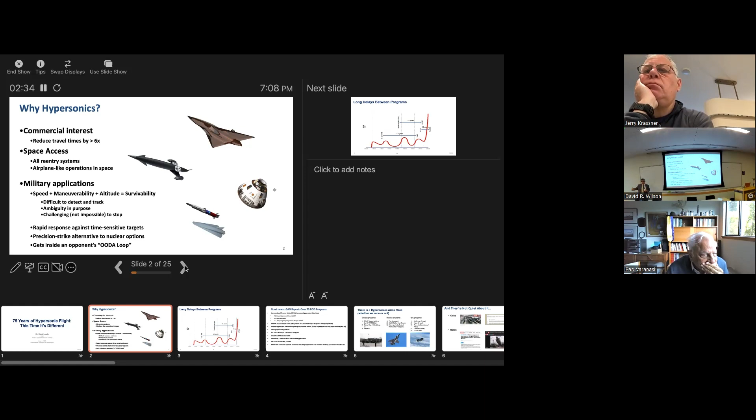Hypersonic flight is flight in excess of about 5 times the speed of sound. You always have to say about, because there's no fixed definition for hypersonic. Unlike the transition from subsonic to sonic to supersonic, the fundamental physics of aerodynamics doesn't change dramatically. Hypersonics is just the high end of supersonic flight, where certain effects start becoming important. Chemistry becomes important. Heat transfer becomes important. Shock waves are pressed very close to a slender body, and all those features are something that we as a community have been pursuing for actually many decades.

So I want to start with the basic question: why would you want to fly at hypersonic speeds? And the answer is sort of obvious. If you've ever flown from Seattle to Sydney, Australia, you'll understand immediately why you would like to fly at hypersonic speeds. Right? There are a lot of advantages to moving at high speed. Certainly, a lot of commercial interest right now. There are companies that are claiming to pursue hypersonic flight for commercial applications. Ultimately, space access. You can use hypersonic systems to give you airplane-like access into space.

But really the focus for the last several decades, and the big current focus today, is on the military applications. I've got an object that can fly at hypersonic speeds in the atmosphere. Not only is it fast, but it can use aerodynamics to be maneuverable. And it can also operate at altitudes that are particularly difficult to detect and to stop. So that means that a hypersonic system is a very survivable system. So for example, if I'm building a missile, if I make it a hypersonic missile instead of a ballistic missile, operating in the atmosphere, it's much more likely to penetrate to its target. Therefore, you can see the obvious military interest.

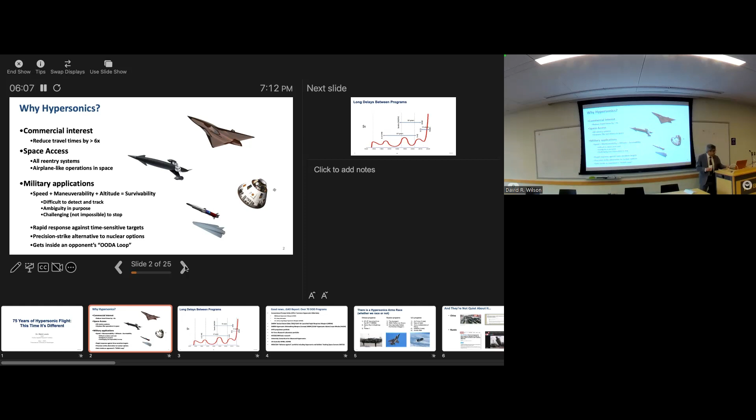It's how the Air Force thinks about the decision process. When you identify a target, decide what it is, figure out what you're gonna do against it, and then take that action. And so you'll often hear the saying, get inside the opponent's OODA loop. That just means you are moving so quickly, you are so hard to figure out what you are, they're so hard to figure out where you're going, that someone can't even decide what they're gonna do to counter you. So all those features, as you can imagine, makes hypersonics a particularly attractive area to invest in.

All right. So for the title of my talk, you saw the title, This Time It's Different. And the reason I say that, for those of us who've been in the field for many, many years, we have observed that there is a funding and programmatic interest periodicity in the field of hypersonics. So I'll take you through some of that history.

The first human-made hypersonic object was a sounding rocket launched on top of a V-2 rocket that had been captured from Germany. Launched in 1948, it was something called Project Bumper. The sounding rocket hit a little bit above Mach 5, almost Mach 6. And so that makes it the first official human-made object. Interestingly, that was done at White Sands, and after they did a couple of those flights, most of which failed, they decided they needed to find a new location. So the Air Force decided to locate at a new launch site in Cape Canaveral, Florida, which was the origin of what is now Cape Kennedy.

After those launches, some experimentation, then the 1960s hit. And throughout the 1960s, we were flying a vehicle called the X-15, the X-15 rocket plane. If you've been to the Air and Space Museum in Washington, D.C., if you've been to the Air Force Museum in Dayton, Ohio, you can see an X-15, an incredible program. They built 3 vehicles. They flew them throughout the hypersonic flight corridor, 199 separate flights, piloted by some very famous pilots, including Scott Crossfield, but also Neil Armstrong. And a couple years ago, there was a movie made about Neil Armstrong's life, and it actually opens with the scene of him flying the X-15 rocket plane.

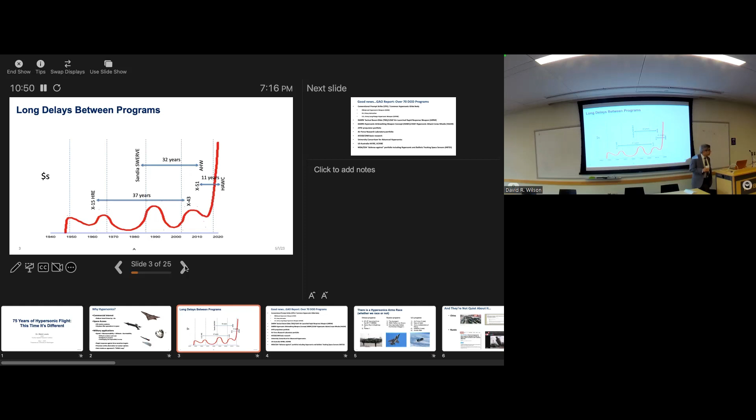So, a year ago, November, the General Accounting Office did a survey of all the current hypersonics programs that were currently funded in the US government. And they came up with a list of over 70 programs across the field. For faculty members, take notes. That means there's lots of funding available in the area of hypersonics, lots of dollars flowing at everything from the very fundamental level all the way to the advanced level.

The key programs were actually real production programs. So the US Navy has something called the Conventional Prompt Strike Program. They're working with the US Army on that program. The US Air Force has a program. They had a program called ARRW, and now have a program called HACM to deliver a hypersonic cruise missile. DARPA, the Defense Advanced Research Projects Agency, has a number of programs in the field, including something called the Tactical Boost Glide, we'll talk about in a little bit, and the HAWC program, the Hypersonic Air Breathing Weapon Concept program.

Then there are the fundamental efforts. AFOSR, the Air Force Office of Scientific Research, part of the Air Force that invests in basic research, has a pretty robust hypersonics portfolio. The Office of Naval Research, also the arm of the Navy that does basic research, they're investing in the field as well.

Big development. In 2019, the department set up something called the University Consortium for Applied Hypersonics. I believe the University of Washington is a member. Right now, I think there are over 100 universities and over 100 industry partners funded in this consortium. And here the goal is to have university faculty members working with direct relevance to the major efforts that are underway.

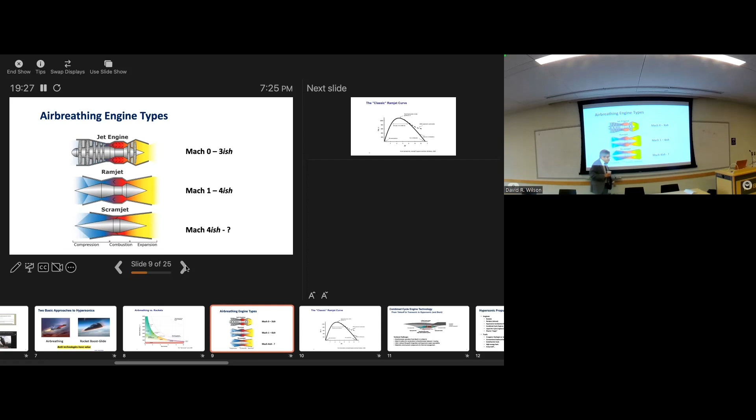As you increase your Mach number, you get a pressure rise. You can get useful work out of the engine. Ramjets typically operate above Mach 1. They don't work well below Mach 1. But then you get to this point where, as you get a higher and higher Mach number, a ramjet stops working. And the simplest explanation for that is that when the air is coming into the ramjet, it's slowing down.

It's decelerating. At some point, it decelerates to the point where the static temperature is equal to the combustion temperature, which means the air is now as hot as it's going to get if you burn fuel. So you don't release any energy by the additional combustion of fuel. You don't release energy, you can't produce useful work. There's no thrust.

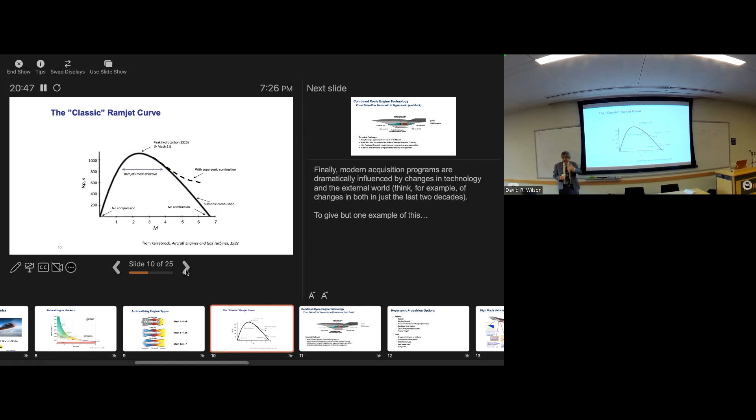So the solution to that is you never slow the air down completely inside the engine. You keep it moving at high speed. And if that happens, you can continue to produce thrust at higher and higher Mach numbers. So that's the theory behind the scramjet. And it's something that honestly I've spent most of my career working on in various incarnations.

Now, remember, scramjets don't work at low speed. So what do you do at low speed? Well, if you want to build an airplane, for example, that takes off from a runway at Mach 0, flies through transonic to supersonic, then hypersonic, you need to combine engines in some way. You need to combine cycles. You have an engine which is a scramjet as part of its flight and another kind of engine at other parts of its flight, or you do multiple engines, a low-speed propulsion system or a high-speed engine.

Various takes on this, various concepts have been proposed. But in most cases, we usually would combine a turbine of some sort from low Mach numbers with a ramjet and a scramjet for higher speed operation. All right, so with that in mind, if I gave you a list of all the propulsion concepts for hypersonic flight, it actually would be a long list. I mentioned rockets. That's a simple one. We know how to build rockets. Ramjets almost get there, but not quite. Scramjets, combined cycles I just mentioned.

There are other engine concepts, liquid air cycle engines, where I use really, really cold fuel to condense air, make it liquid air, and then burn it like a conventional rocket engine. And then every couple of years, someone comes up with some new plasma magic where they're going to ionize the air and accelerate electromagnetically and magically extract energy and put energy back into the flow. And they never work, but they keep kind of coming back as ideas.

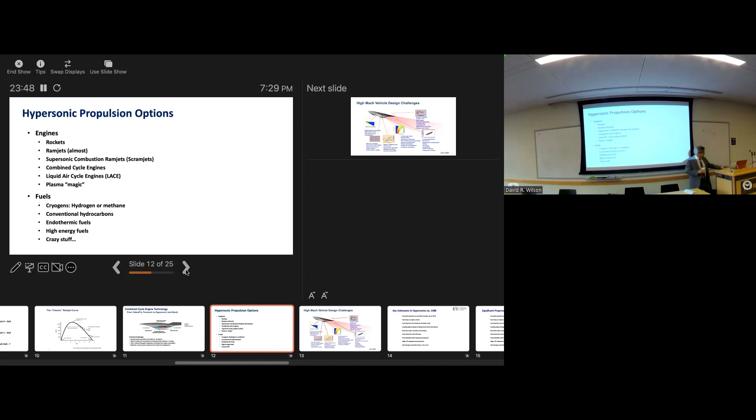So I'll show you we've made progress on almost every single one of these categories, but there's still a lot of progress left to be done. Right? There are still ways that we can optimize these systems. But if you look at those challenges, they fall in several categories. One is getting the engine to work and integrating the engine with the vehicle.

Hypersonic vehicles tend to be very slender. It means the front of the vehicle is the inlet, the back of the vehicle is the nozzle. So I've got to design an engine that integrates well with that inlet, the inlet forebody, with the nozzle aft body. And if I don't get the flow field right on those parts of the airframe, it could have really bad effects on the performance of the engine.

Understanding chemistry inside the engine. On a typical scramjet engine, the residence time, the amount of time that air spends inside the combustor, is about 1/1000th of a second, a millisecond. So you've got a millisecond, the time the air enters the front of the engine to the time it goes to the back of the engine, in which to inject your fuel, mix it, and burn it efficiently.

That's quite a challenge. Lots of aerodynamic effects on the outside of the vehicle. At hypersonic speeds, you get really hot. So handling surface temperature is really important. Sharp leading edges, especially, get very hot. You need a sharp leading edge if you're gonna fly through the atmosphere for a long period of time, so you've got to handle that.

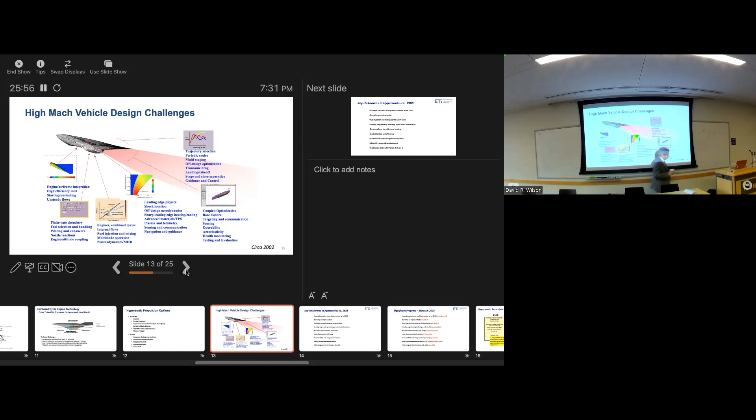Understanding the basic physics, what happens in a boundary layer at hypersonic speeds, still a big unknown. What happens when a shock intersects with another shock wave at hypersonic speeds, still a big unknown. And so really, really long list of fundamental problems that will keep us all in business for some time to come. So let me zero in on a couple of those, especially related to propulsion.

And this is kind of slightly self-oriented, how life has changed in the time that I went from a graduate student to where I am today. Right, so I graduated with my PhD in 1988, and at the time, we had a list of all these problems that we thought were almost insurmountable. We didn't know if you could actually build a scramjet engine that would operate at any Mach, let alone Mach 25, which the folks running the National Aerospace Plane wanted to do.

We didn't know what would happen if a scramjet engine flying at high speed, designed with a relatively weak shock wave, suddenly disgorged a normal shock wave. It's called an engine unstart. And when that happens, you get a sudden pressure rise. Thinking at the time was the engine would actually not survive that phenomenon, that the engine would blow apart.

We didn't know if you could even inject fuel and mix it at high Mach numbers. We didn't know about boundary layer transition and heating. We're pretty good at characterizing when boundary layers transition from laminar to turbulent at lower speeds, not so much at high speed.

Didn't know the effects of inlet distortion. We didn't know if you could even control a hypersonic vehicle. There are all these fundamental questions. You know, if the engine is so coupled with the performance of the airframe, what happens when you maneuver? What does it do to the engine? All right, if I pitch up, do I suddenly lose thrust?

Things like that. We didn't even know how to design fully integrated systems where I had really high lift over drag ratio, which I need for long duration cruise, but also integrated propulsion plants. We didn't even know what the inlets for those vehicles should look like. Should they be square? Should they be round? Should there be something in between?

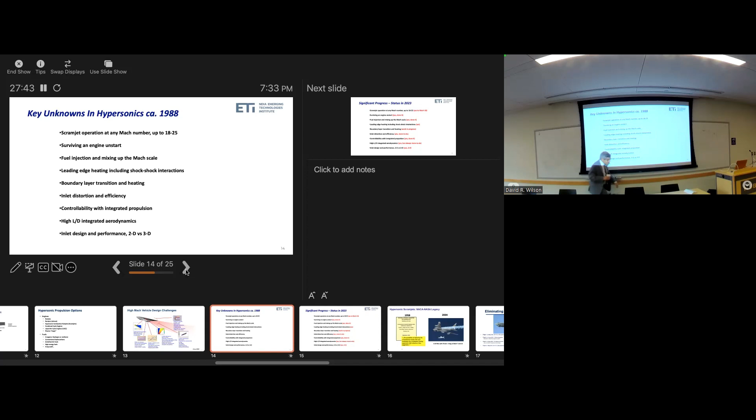I'll fast forward to where I think we are today. So first question, scramjet. Yes, we run them. Well, not to Mach 25, probably never to Mach 25, but we run them at Mach 5, we run them at Mach 7, we run them at Mach 10. Those scramjets work. Turns out engine unstarts, at least under those conditions, they've happened. The vehicle survived. And indeed, under some circumstances, the engines actually restart and go on powering the vehicle very nicely. Fuel injection, yes, well, if the scramjet worked, then you were able to inject fuel, mix it, and burn it.

Leading edge, a lot of work has been done on leading edge heating, lots of fundamental work, applied work. Boundary layer transition remains an unknown category, and so a lot of work underway in that area. But what we've essentially learned is we have to design against our unknowns. So if we don't know where the boundary layer is going to transition, then we have to take that into account in the design. Although there have been some programs that got stuck trying to do that, and on and on. So the list is actually pretty good. We've made a lot of progress.

Let me talk about some of the key programs that made that progress. So earlier on, I talked about the X-51 program. But first, I'm going to start with the X-43 program. So X-43 was a NASA program. It was a small scale vehicle, about 12 feet long, mounted on a rocket. This is a Pegasus rocket from what was then Orbital Sciences Corporation, now part of Northrop, dropped off the wing of a B-52 bomber. And in 2004, they did 2 flight tests on X-43.

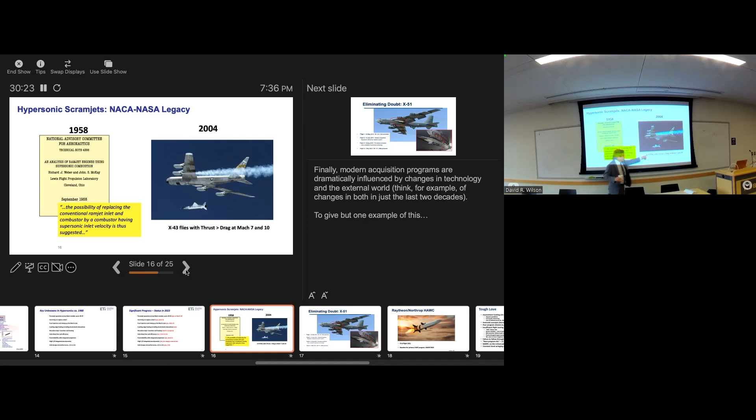You had 2 researchers working at what was then the Lewis Flight Propulsion Laboratory in Cleveland, Ohio, now the NASA Glenn Research Center, Weber and McKay, and they did this fun little paper, which is this thought experiment. They started with a ramjet engine, and they did the thought experiment of what would happen if, instead of slowing the air down inside the engine, I kept the air moving at supersonic speeds. It's a beautiful, beautiful piece of work, because they essentially established all the fundamental underpinnings for all the work that came subsequently. But 46 years later, we actually got their theoretical concept to work in practice.

Now, after this incredible success, what did the United States Air Force do? This is an Air Force Research Lab program. What did they do? Did they build on that success? Did they continue investing? Did they build more X-51s? No, they stopped the program. They actually flat out canceled it. And they all high-fived and went home and said, all right, we've done that.

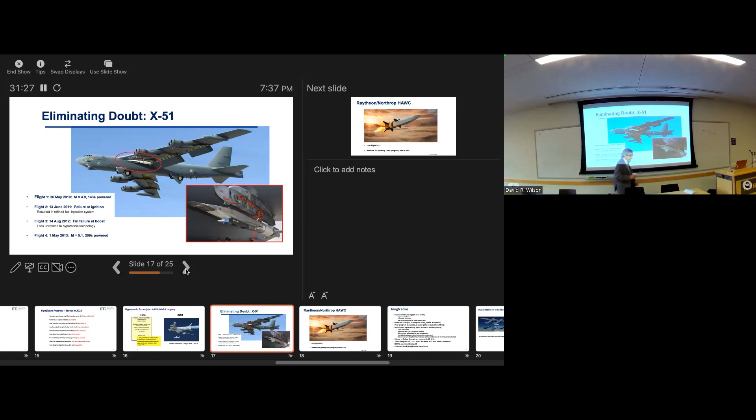And the result is that the very next time that we flew a supersonic combustion ramjet was in 2021. This is the DARPA HAWC program, which is the technological successor to the X-51. You'll notice it looks somewhat similar. It's got a rocket booster that gets it up to speed, and the rocket separates. Instead of a squared inlet on X-51, it's now got a round inlet, because we think that's the better way to design inlets. First flight was in 2021.

Second thing about this is that HAWC has now become the baseline design for something called HACM, the Hypersonic Attack Cruise Missile. And that's going to be a real US Air Force program. So it took us a while. It took us some breaths, a lot of handwringing, but we're kind of getting there.

All right, so now let me get to the tough love part of the field. And this is where I get to yell at my colleagues in hypersonics for what we've all collectively been doing wrong. I started out talking about the inconsistent funding cycle in hypersonics. That's bad for several reasons, not the least of which is it impacts the workforce. In the days of the National Aerospace Plane, there was tremendous ramp up of workforce in hypersonics. Companies were hiring, universities were investing.

I was in that wave. Then that all went away. And I had a lot of colleagues who got out of the field. A lot of that investment was lost. Right now, in fact, in the last few years, most of the companies working in hypersonics have been trying to hire fast and furiously, and they're finding it difficult. One of the reasons we're so excited about the UCAH program that I mentioned, the university program, is helping to reinvest in the workforce.

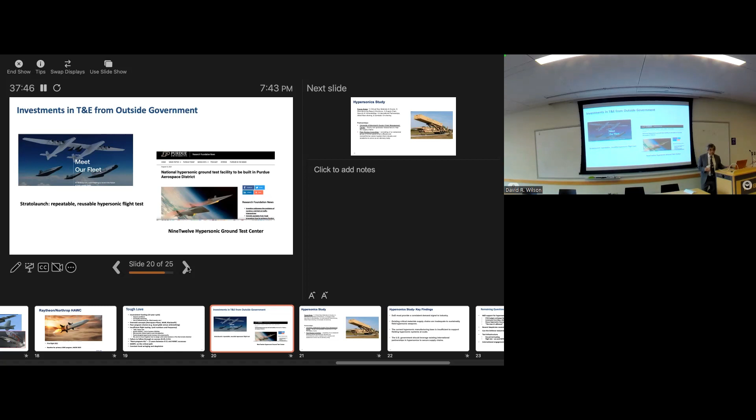Purdue University, which is going to be my employer as of a week from today, has exotic plans to build something called a hypersonic ground test complex. It'll be a big wind tunnel complex, and they're looking for private investment from industry to help them make that happen. A little bit of investment from government, but mostly from industry. The idea is build it and they will come, which is to say the government will step up to the plate.

All right, let me shift to another aspect of hypersonics, and that is supply chain. And this is something that I've been involved in very, very recently at the National Defense Industrial Association. We decided to do a look at what supply chain you need if you're going to build hypersonic vehicles in large numbers. And we looked at critical raw materials and goods. We looked at how you manufacture these things. We looked at vulnerabilities. Can someone mess up your supply chain? And then we looked at the importance of international partnerships.

We teamed up with my old employer, University of Maryland. They've got a supply chain management center, and they did a deep dive across the board. There are some unique materials that get used in a hypersonic vehicle, high temperature materials, for example, that come from around the world. So that was one of the key areas that we focused on. Manufacturing. So today, most of the concepts for hypersonic vehicles involve the use of additive manufacturing. We're not really good at large-scale bulk additive manufacturing, so that was something else that we identified. And we came up with a couple of recommendations.

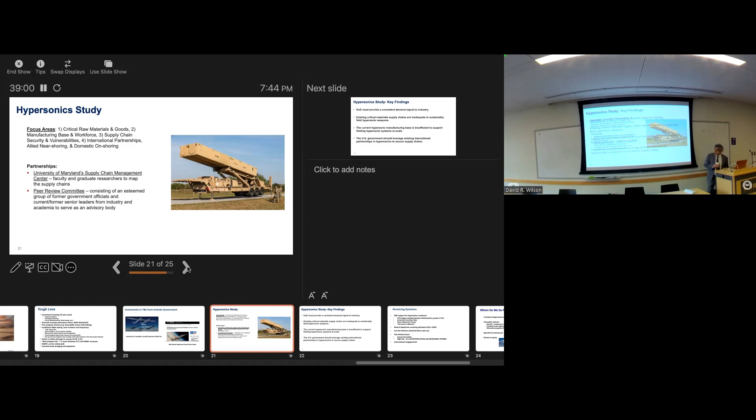First, we kind of told the DoD what should be a blinding flash of the obvious, that you need to have consistent demand signals in industry. Lots of people in industry tell us, every 15 years, the bottom drops out of this field. So if you want us to invest and build our own wind tunnels and build up our workforce, you need to be consistent. We found vulnerabilities in critical materials. We found that the supply chains today are inadequate to sustainably field the numbers of weapons that the DoD would need. We found that the manufacturing base is insufficient to support fielding large numbers of these things.

And we put a really strong emphasis on the importance of working with friends, partners, and allies. I mentioned earlier the Australia partnership. It's a big part of what the department is doing. But that becomes absolutely important, not just for intellectual capital, not just for capabilities, but also to secure our supply chains.

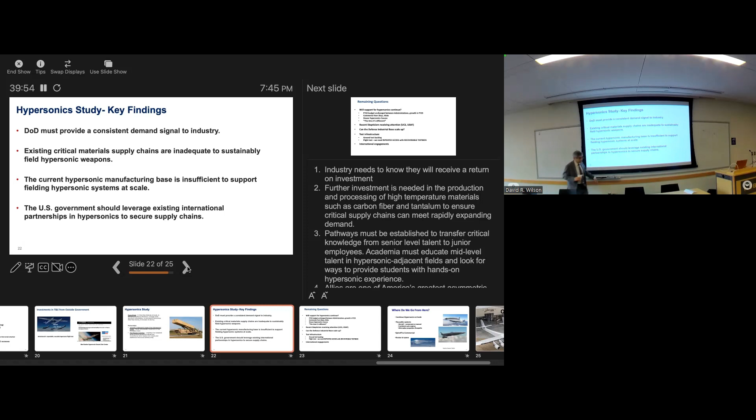All right, so let me close up by posing some remaining questions. First, the obvious one: is it really different this time? Will support for hypersonics continue? Well, if you look at the way the government's been budgeting so far, the answer seems to be yes. The FY22 budget showed a significant ramp up in funding in the field, and then the FY23 budget came out and was even better.

So that's kind of good news. You hear good comments coming from Pentagon leadership. Heidi Shyu, who is the Undersecretary of Defense for Research and Engineering in my old office, has been very supportive, as has the Deputy Secretary of Defense, Hicks. The House of Representatives set up something called the Hypersonics Caucus, which is to promote hypersonics. So I think it's pretty safe to say, yeah, this time it's different.

There's been some recent skepticism. About a year and a half ago, the Union of Concerned Scientists wrote a paper attempting to debunk the value of hypersonics. I have suggested it as recommended reading for all graduate students in the field because it is so technically flawed in so many ways. I'll give you an example. They decided to model a hypersonic vehicle.

So they found an aerodynamic model from a Chinese publication of a US configuration that we flew and it didn't work. And by the way, the model was wrong. So it was the wrong model and the wrong configuration. And then the folks who wrote that paper flew the vehicle at -4 degrees angle of attack, which is hilarious. And so all the results were wrong. But it got published by the Union of Concerned Scientists, and got a lot of attention, unfortunately.

That's a really interesting concept, but you're flying hypersonic. So basically you're hot. Yes. The stagnation temperature is very high. If you're going to be liquefying all this air, how do you sink all the heat? So the idea, Alan Bond's original idea, was to use hydrogen fuel. So he's got liquid hydrogen as his heat sink, so he's sinking it into liquid hydrogen.

And you're right, I'll tell you the other challenge, which is, if you work through the numbers, you need to ingest a certain mass of air to use later in flight. So you often find yourself flying around. Let's say, for instance, you want to fly to orbit. You find yourself flying around a lot to build up your oxygen supply, so you've got enough that will allow you to continue on your way to orbit.

There's another fundamental problem, which is if you're using a rocket engine, say, as your propulsion system, the maximum velocity you get coming out of a rocket is gonna be a little bit less than 5,000 meters per second. In order to get to orbit, you need a delta V of about 9,000 meters per second. So there's a little bit of a mismatch there. As a result, you wind up having to store mass on board as you're flying. And that's also bad because it defeats the whole purpose of being an air breather in the first place.

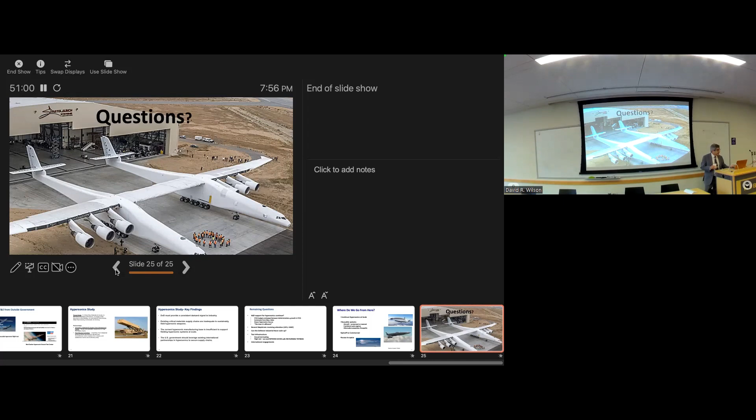So if you combine their heat exchanger technology with other engine cycles, you can essentially do it as a pre-cooler on a jet engine, for example. So you can essentially trick an engine into thinking it's flying at a lower Mach number. It's another way to kind of push up the Mach scale. Other questions?

Do you think we'll see one? Well, it all depends on which one. Or the Reaction Engines. Not in the foreseeable future. Yeah. And not for technical reasons. So there was originally a lot of technical skepticism about the liquid air cycles. One of the other problems they encounter, by the way, is when you fly into the atmosphere, there's moisture in the atmosphere, you've got a really cold heat exchanger, it tends to ice up and become less effective. They've come up with some intriguing technology. Essentially, they do a chemical coat on their heat exchanger that prevents ice buildup. So they made it through that first skeptical point.

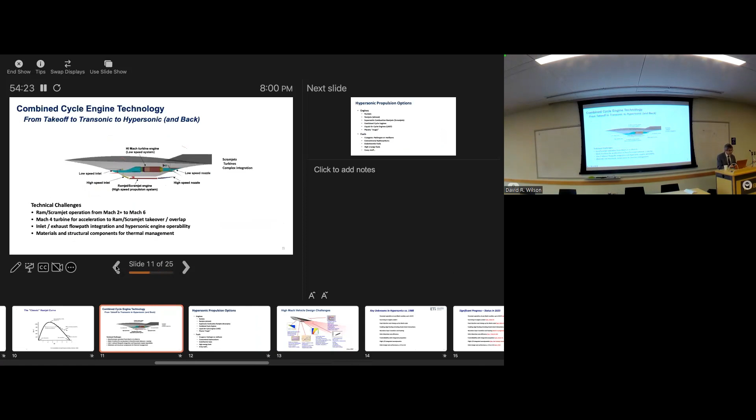Do you think laser weapons will get a lot more funding as these hypersonic vehicles get deployed? So laser weapons are already getting a lot of funding. So I'm not actually a big fan of trying to use lasers against the hypersonic system. So let me go back to my picture. Almost. Okay, so let me go back to my picture here.

All right. So the key there is I designed this thing to handle the heat load corresponding to Mach 10 glide. Now, when am I going to use my laser? Well, I'm probably going to use my laser towards the end game, right? So this thing is coming at me and I want to shoot it down with a laser. When I'm hitting it with a laser, it's at the least thermally active portion of its trajectory. So I'm trying to hit something with lots of energy that was designed to handle Mach 10 or above. And by the time I'm hitting it, it's maybe Mach 4, maybe Mach 3. So what can I do? Now, there are people who say, oh, we're gonna hit it with a laser, we're gonna knock off pieces of the thermal protection system.